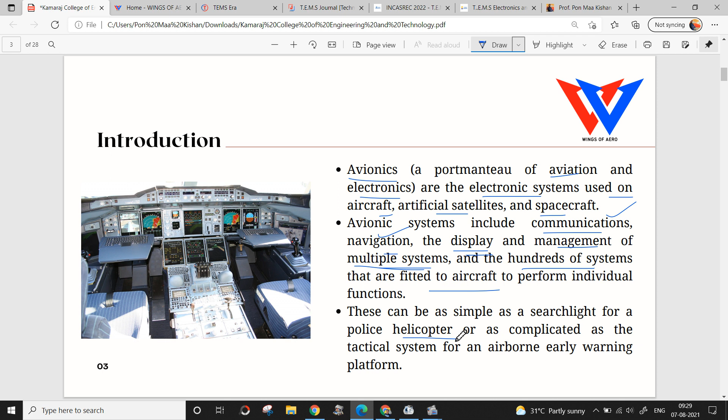Before entering into the core area, I would like to show one interesting slide so you can understand how this lecture is going to be helpful for your bright future.

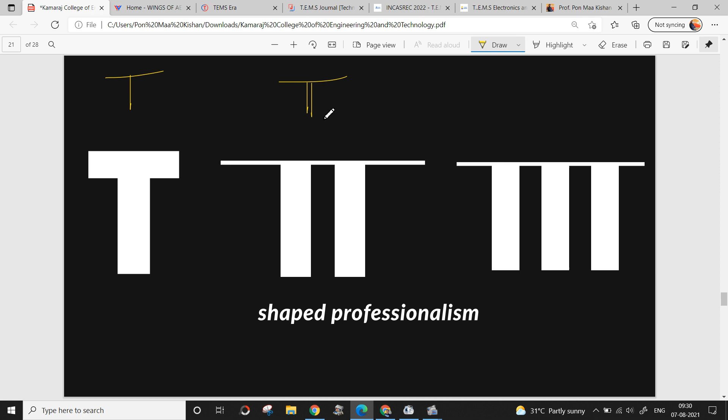Basically, professionalism - you are a professional student, and when you complete the degree, you are a professional. Your faculty is a professional, and everyone, all engineers working out there, come under professionalism. Here I have mentioned three different categories of professionalism: the first is T-shaped professionalism, the second is Pi-shaped professionalism, 3.14, and the third is M-shaped professionalism. So why am I going to explain this, and what is the importance of this professionalism?

At the end of the lecture, you should be aware of how this is going to help your future. So let's start with T-shaped professionalism first. There is a horizontal line and a vertical line in the T shape.

Let's consider the horizontal line indicates the engineering degree we are studying, and if I'm speaking about myself, the vertical line is my degree branch, aeronautical, aerospace. In your case, it is electronics and communication. Generally, when people pass out, they come with this category. If there are 100 students, over 90 come with T-shaped professionalism - that is, engineering is our degree, and our branch is aerospace, or EC, or mechanical, whatever it is.

But what does a company currently expect? What does the industry expect from us? There are so many engineers out there, so they don't need those who are specialized only branch-wise, like someone with a degree in aerospace, or a degree in EC.

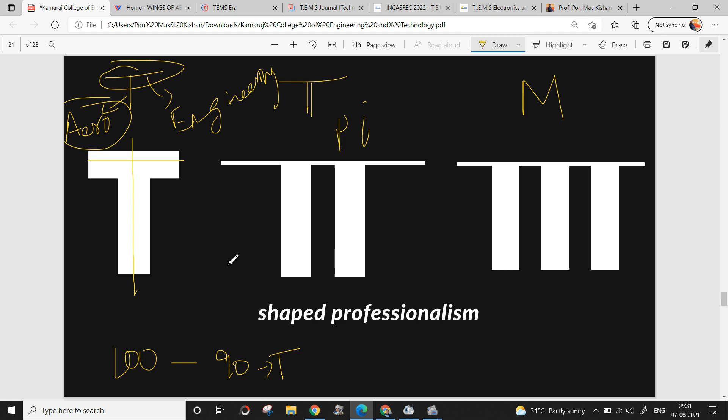The companies currently in 2021 are expecting pi-shaped professionalism. So what does this pi-shaped professionalism mean?

So again, we are having a horizontal line and two vertical lines. This horizontal line indicates engineering, and the vertical lines indicate our branch, in your case EC, or aerospace in my case, and the second vertical line is the area in which I am specialized. There are many areas in aerospace: aerodynamics, propulsion, flight mechanics. There are many specialized areas.

I can also include avionics. There are many specialized areas. So in which area am I specialized? Being an engineer, I have to get specialized in one of the core areas, aerodynamics, flight mechanics, or avionics. This is what the company is expecting. I don't need a general degree, I need people who are having a specialized area.

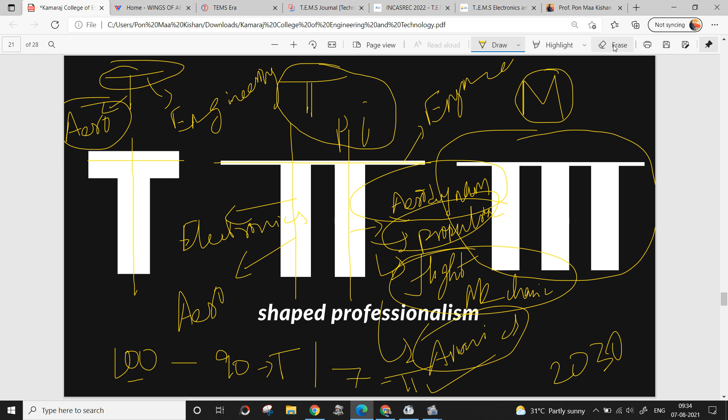Again we are having a horizontal line and 3 vertical lines. The horizontal line indicates engineering, the first line indicates my branch, aeronautical, and the second line indicates my specialization. Let's consider, in my case, I am specialized in flight mechanics. So the third vertical line indicates how I am going to apply or collaborate with other branches.

I am having a specialized aerospace branch degree, and I have specialized in flight mechanics, but that is not enough. How am I going to use a third specialized department, let's say computer science, mechanical, or electronics ECE? How am I going to use these specialized departments that will help in my specialized area, that is flight mechanics?

I have to take applications of CSE either to develop some software for my flight mechanics subject, or go to the mechanical department to do some materials research, or do some mechatronics research work, or work with the electronics ECE department to develop electronics which will help my specialized area, flight mechanics.

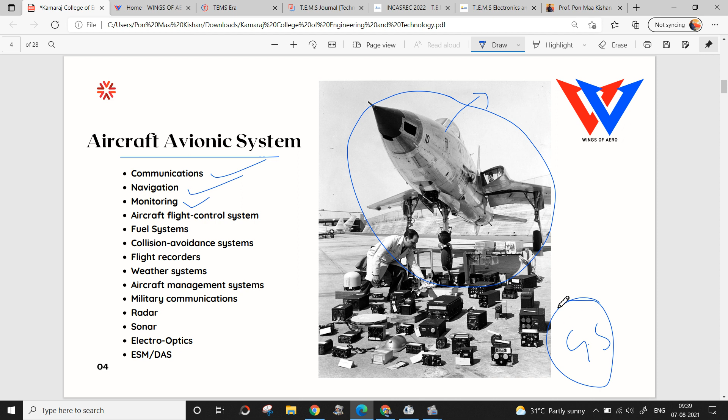Monitoring: the entire aircraft will be monitored. The systems of the aircraft will be monitored in the cockpit by the pilot, as well as from the ground station. Ground station, GS. You might have heard about the air traffic controller, ATC. Every airport has this air traffic controller, and they will monitor your movements. All the systems will also be monitored in the pilot's cockpit, and apart from that, the ground station will also monitor your flight. So for that too, electronics is very much important.

Aircraft flight control systems: how are we going to control the aircraft? We have to fly, right? We are not driving a car. A car has wheels and drives on a road, but here we are going to fly. So to fly in the air and to stabilize the aircraft, we need flight control systems. I will explain what control systems are there and how this can be done mutually with electronic instruments. So flight control systems are very much necessary.

Here I have just listed these out. In the next upcoming slides, we will see in depth all these systems. So flight control systems we will see in the later slides.

Fuel systems: fuel sensors and fuel. The fuel is stored either in the wing or under the fuselage of the aircraft, under the wing or under the body of the aircraft. So fuel injection, fuel separation, and fuel alignment have to be decided and controlled. Fuel flow control needs to be done. So fuel systems are there.

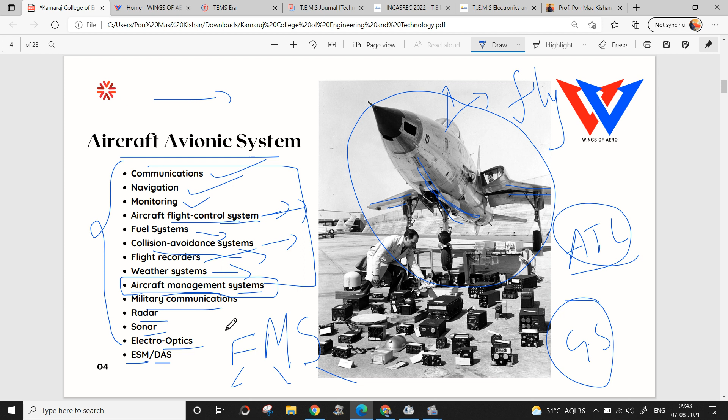So then we are having military communications. For fighter aircrafts, different types of communication systems will be used: military communication, radar, sonar, and electro optics will also be used. ESM and DAS are for defense. We will see what these factors are and how they are helpful in upcoming slides.

So these are the avionics systems. What I have given is systems - what are the instruments used in an aircraft? As I told earlier, I am not going to cover the modern aircrafts. I am going to cover the basic aircraft instruments, since you guys are not very much aware of what the instruments used in the aircraft are. Once you understand these concepts, you can learn many things about modern aircrafts also. So let's see what the basic aircraft instruments are.

Pitot static systems and instruments, altimeter, vertical speed indicator, airspeed indicator, attitude indicator, heading indicator, turn indicator, slip/skid indicator, turn rate indicator - these are the very basic aircraft instruments.

When I speak about very basic aircraft instruments, I hope you might have seen some aircrafts which have a two-seater aircraft for pilot training, or some aircrafts having a four-seater aircraft. So in those aircrafts, how and what type of instruments will be there? That's what's listed over here.

So we will see this. First of all, what is Pitot static systems and instruments? I will explain all these instruments, no need to worry. So let's see the first one, Pitot static system and instrument.

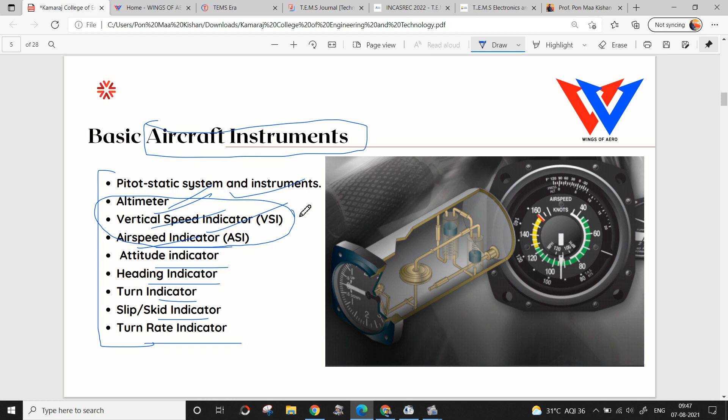So here we are having airspeed indicator, vertical speed indicator, and altimeter. I will explain all these instruments individually in the upcoming slides - altimeter, vertical speed indicator, and airspeed indicator. All these three instruments work with a single system called pitot static system, without which these instruments cannot work.

So let's see what this altimeter is working on, and what this vertical speed indicator is working on, and airspeed indicator.

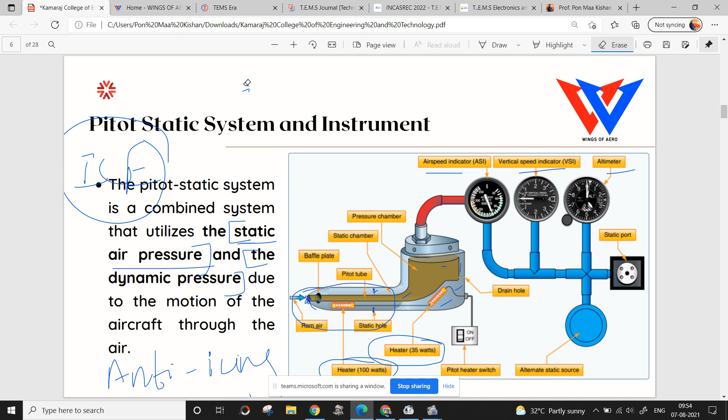Once we get the initial value of pressure, because we are flying at 10 kilometer altitude, we need to know the value of pressure so that we can find out at which altitude we are flying and at what speed we are flying.

So the first instrument we are going to see is altimeter. So here we are having three instruments: altimeter, vertical speed indicator and air speed indicator. So the first one we are going to learn is altimeter.

So altimeter, as I told, this is the basic mechanical instrument which was used earlier in the olden aircrafts. And it is still used in pilot training aircrafts and small aircrafts, 10 to 20 seater aircrafts. They are using this manual system, manual instrument. But altimeter is very much necessary. In modern systems also we are having altimeter, modern avionic instruments also have altimeter.

Altimeter is the instrument which will help the pilot to know the height of an aircraft above a given pressure level. We are having sea level, mean sea level, we will be calling that mean sea level. Suppose the aircraft is flying at a certain altitude, the pilot cannot determine with his naked eye at which altitude the aircraft is flying. So one instrument which will help the pilot to calculate the height of the aircraft is this altimeter.

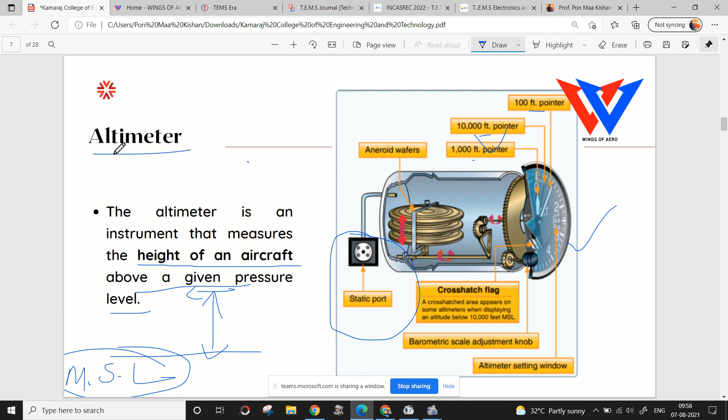So the next one is airspeed indicator. Altimeter will help us find the altitude of the aircraft, and airspeed indicator will help us calculate the speed of the aircraft - speed of the aircraft, like speed of our car or bike. We are measuring the speed of the car or bike, but it is not the easiest thing like measuring for a bike or car, because we are flying, we are not driving.

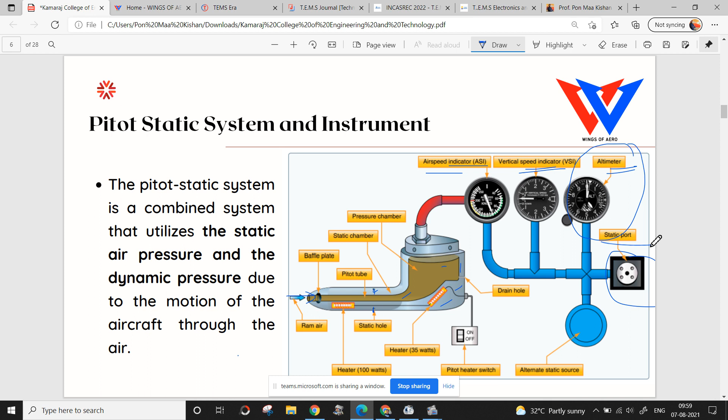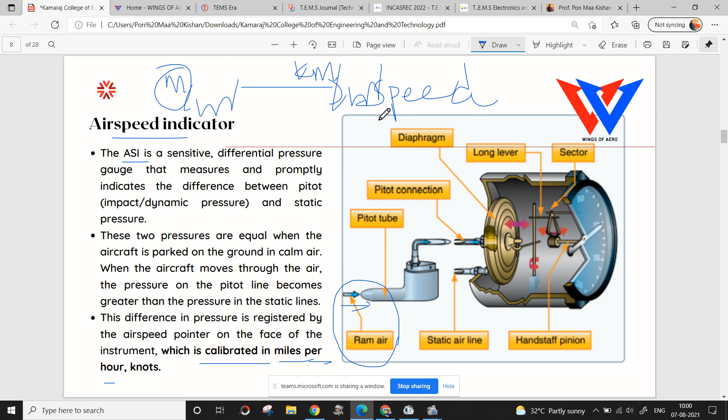So the airspeed indicator needs the dynamic pressure, that is ram air. In the pitot static tube we have the inlet air over here. So the altimeter will use the static port, whereas the airspeed indicator will use the dynamic pressure, ram air. So airspeed indicator, or ASI as they call it, is an instrument which will help calibrate the speed of the aircraft in miles per hour - like how we mention kilometer per hour, they mention miles per hour for speed of the aircraft. So to measure the speed of the aircraft, we need the airspeed indicator. This is the second instrument.

So the third instrument is vertical speed indicator. We just learned the airspeed indicator, which means the speed of the aircraft. So what is this vertical speed indicator? We have to understand that our aircraft is not only going to fly in a straight line, our aircraft is also going to fly in a vertical way.

From takeoff, the aircraft is going to fly in a vertical way. It is not only flying in a straight leveled path. It will take off, descend, take off again, perform maneuvers, and various types of activities. So this vertical speed indicator will help us calculate the speed of the aircraft when it is flying vertically.

So horizontal is the speed of the aircraft. Airspeed indicator will help us calculate the horizontal speed. Vertical speed indicator will help us calculate the vertical speed.

So what does vertical speed mean? When we speak about speed, how is it determined? Speed of the aircraft from one point to another, one location to another, like in a bike or car too. Similarly, when traveling from one location to another, the distance is calculated, whether 2 km or 3 km, and how much time is taken to cover that horizontal distance.

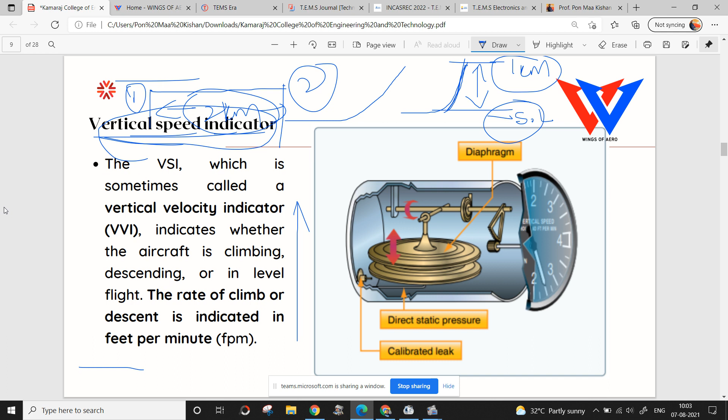So three instruments we have learned so far. One is altimeter, to identify the altitude. Second is airspeed indicator, at what horizontal speed the aircraft is flying. And vertical speed indicator, at what altitude the speed of altitude needs to be determined - that is called rate of climb or rate of descent, in feet per minute.

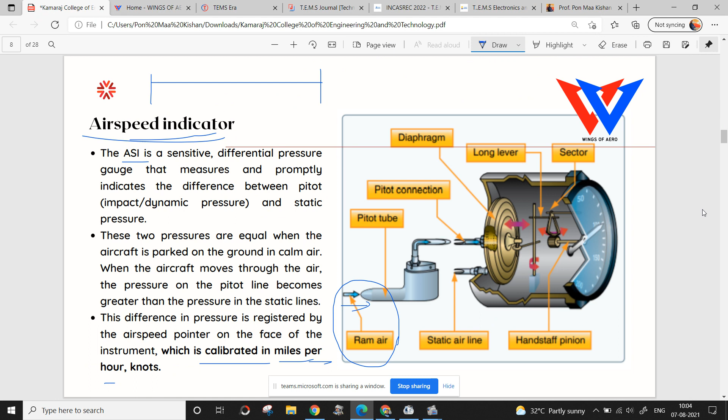So these three preliminary instruments are very much used in the aircraft. So the fourth instrument is turn indicators.

So when we speak about turn, the word turn means like when we are riding a bike or car. When there is a sudden turn, in the left or right turn, we turn the bike or car at a particular speed. We will be reducing speed, moving the steering, and turning left or right as indicated.

But when it comes to the aircraft, it is not that easy, because in a bike or car we are driving with support - the wheel is supported on the road, on the ground. But in an aircraft there is no support. We are flying and we need to turn.

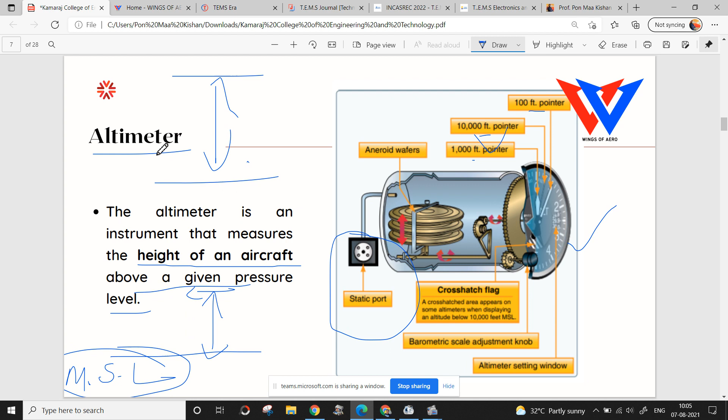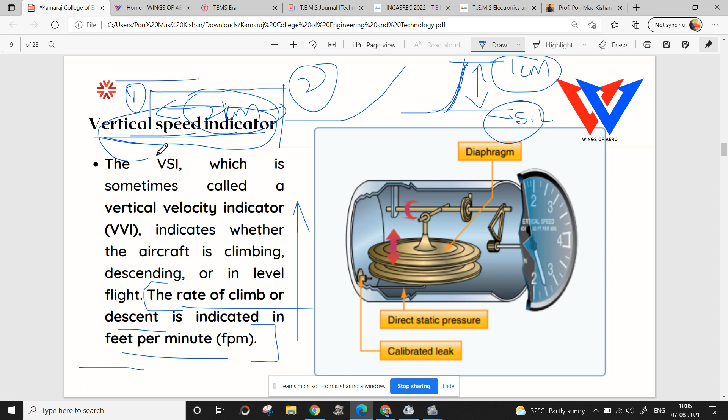So for better understanding of this concept - what is exactly happening in this turn coordinator and turn slip indicator - I need to explain a few factors. Without these few factors, you cannot understand what is happening in the turn indicator and turn coordinator. You can easily understand altimeter, to measure the altitude at which the aircraft is flying, airspeed indicator for horizontal speed, and vertical indicator, the rate of climb. But when it comes to the turn indicator, you cannot simply understand what is happening - you need to know how the aircraft is flying and what are the aircraft control surfaces.

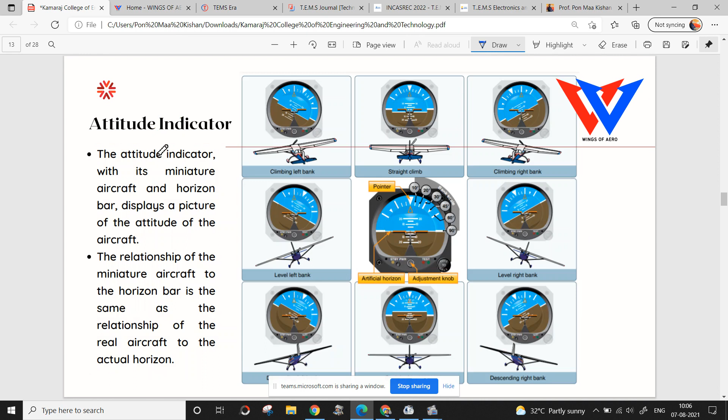So for that, I have included the preliminary aerodynamic forces of an aircraft. Even though you are an electronics engineer, you should not think why I need to know these factors. This is the multidisciplinary, M-shaped professionalism. M-shaped means multidisciplinary. You are an engineer specialized in electronics, and you are going to apply that knowledge in another field. Here we are learning about aerospace vehicles, so you need to know some mechanical concepts too. Without that, you cannot apply your knowledge in that particular field.

So don't think this is not going to be helpful for you. When you want to apply your knowledge in the aerospace sector, you need to know the basic concept of how the aircraft flies. So the basic forces on the aircraft are these four types of forces, and the first one is lift.

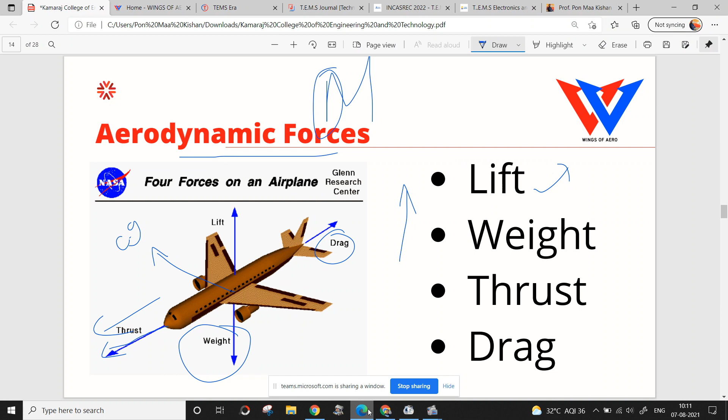Okay, ma'am, fine. So these four forces are acting on the aircraft, and another thing is control surfaces. This is very much important. As I told earlier, in the first system itself, we have various types of control systems, because the aircraft needs to be controlled.

When we are flying any object, it has to fly continuously. Suppose if you are not having stability, it will fall down. So many of you are playing cricket, right?

You might have heard about in-swing, out-swing, and even when the fielder is throwing the ball. At that time we need to do various types of tricks. Every player will be doing some tricks for in-swing and out-swing, rotating the ball to perform that. Similarly, when the bowler is throwing the ball, it is also in the air and it will be rotating, the ball itself rotates to create a movement.

So like that, when the aircraft is flying in the air, to maintain stability, we need various types of control surfaces, control surface systems. The pilot's cockpit will be here, and in the wing section we have various types of control systems, and also in the tail system, tail surface, we have various types of control systems.

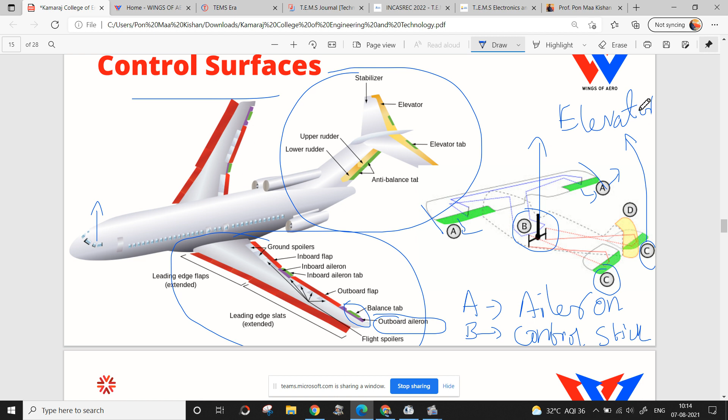And C over here is the elevator. These are all very technical terms, so you cannot remember them easily, but try to understand. These are all the control surfaces - without these control surfaces, the aircraft cannot fly. D is rudder. D is rudder, A is aileron, B is the control stick, which is used and controlled by the pilot for the entire aircraft.

And C is the elevator, green color again in the tail section. So this is in the wing section, this is in the tail section - elevator. And the yellow color one is rudder.

So these three control surfaces - aileron, elevator, and rudder - are used to control the aircraft. Like in a car, we have steering, accelerator, brake, and clutch to control the car. Similarly, in aircraft, although there are various types of parts - engines, instruments, everything is there - when we speak about control systems, these three are very much necessary: aileron, elevator, and rudder.

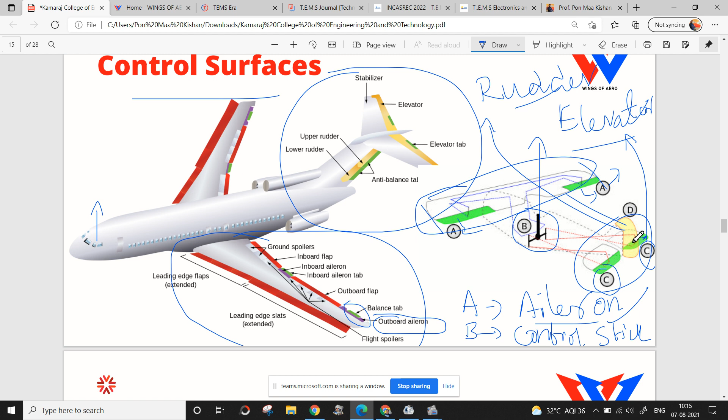Even in spacecraft - I hope many of you might have heard about the space shuttle - I will show how the same concept is implemented in the space shuttle also, so that you can easily understand.

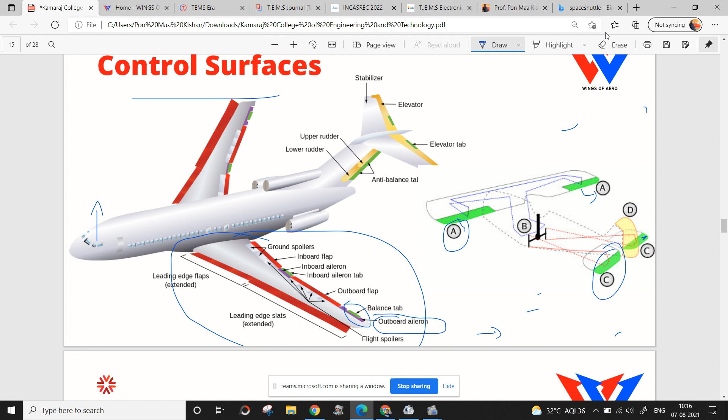The mechanical control system - because the modern control system uses avionics, various types of instruments - but in the olden days they flew this aircraft with mechanical linkages. Mechanical linkages means they used wires to connect all these surfaces, so here you can see they used wires. Now they have sensors where the entire control system is connected with various types of sensors to activate the control surfaces. When we have sensors, we can go for autopilot mode.

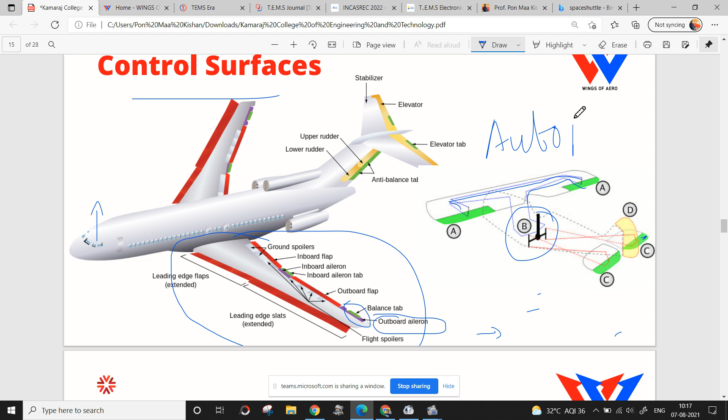So I will explain what autopilot mode is and how they are achieving this autopilot mode. Okay, so this is the control surfaces. Let me switch on my camera so that I can explain with the video and you can understand how the aircraft is going to fly.

So this is the top view. I am showing the top view. Our ailerons will be located here, in the wing section, both sides of the wing we will have an aileron. At the tail we will have the elevator, and at the vertical stabilizer we will have the rudder. So all three control surfaces are going to control the entire aircraft.

So when we speak about controlling the aircraft, it can move up or down, the aircraft can move left or right, and the aircraft can also roll right and roll left. So three different movements the aircraft can give. One is pitching, which means up and down.

So next time when you are flying in an aircraft, you have to understand this concept. When the aircraft is going up, this is pitch up movement. When it is going down, this is pitch down movement. When the aircraft is rolling left or rolling right, and when the aircraft is turning left or turning right, this is called yaw. This is the rolling movement, and this is the pitching up and pitching down movement. So three different movements are there in the aircraft, and we control the entire aircraft with these three different types of movements.

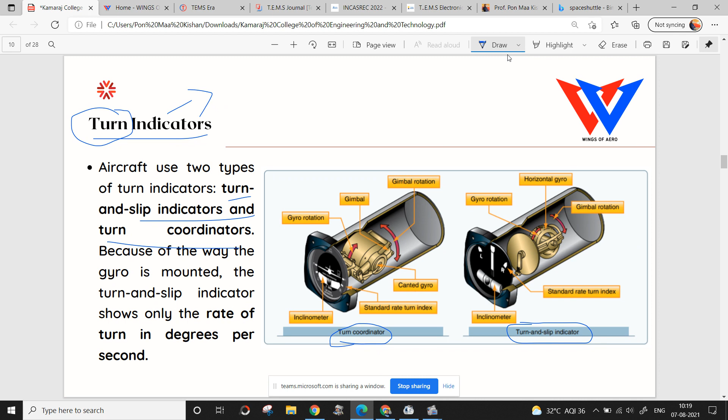So as I told you, the aircraft has three different movements: pitch up, pitch down, left turn, right turn, and also rolling movement. I can explain with this slide itself. When the aircraft is moving up and down, that's pitch movement. When the aircraft is moving left and right, that's turn movement. When the aircraft is rotating clockwise and anti-clockwise, that's rolling movement. Every aircraft, fighter aircraft, spacecraft, everything has this same type of movement.

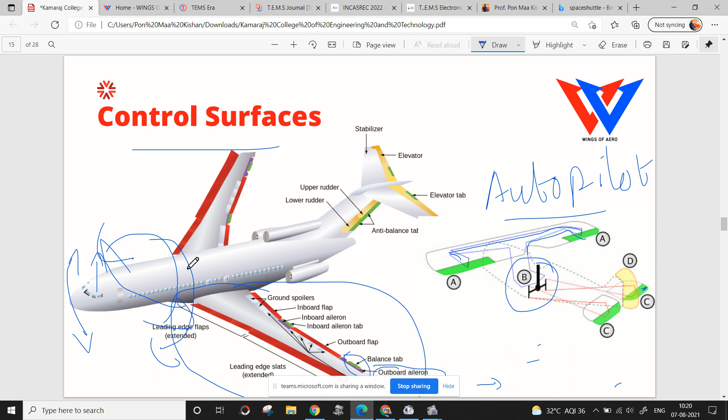Okay, so these need to be controlled with the turn indicators. Why do we need turn indicators? What is the necessity of the turn indicators?

When you are driving a car at, let's consider, 90 kilometers per hour speed, and there is a sudden turn, can you possibly turn the car at the same 90 kilometers per hour? That's not possible. We cannot turn the car with a sudden right turn at the same speed. So what will we do? We will do the necessary reduction in speed, slowing down to 40 kilometers, then 30 kilometers, and then we will perform the turn.

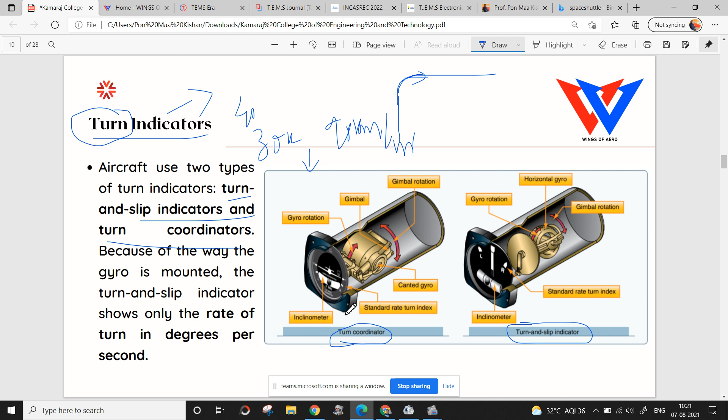Similarly, when the aircraft wants to turn, we need a particular speed limit and a particular turn angle also. That will be determined with the turn coordinator and turn-and-slip indicator. So let's see in the next image how this system is working.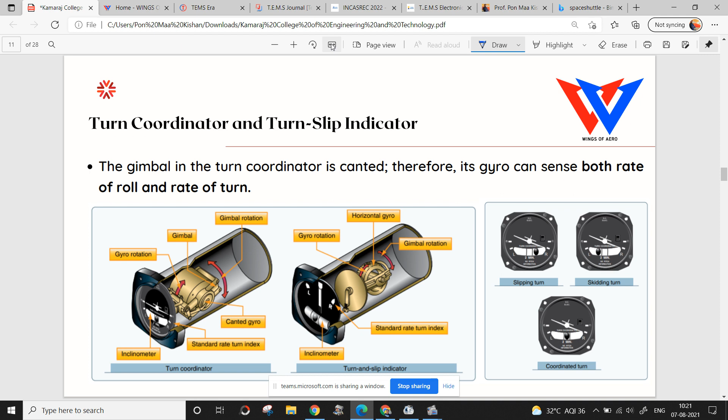So here is this turn-slip indicator. You can see a knob in the instrument, a black color knob. When the black color knob is in the middle, that is the perfect turn, and the aircraft is said to be in a coordinated turn. So the pilot will always prefer going into the coordinated turn.

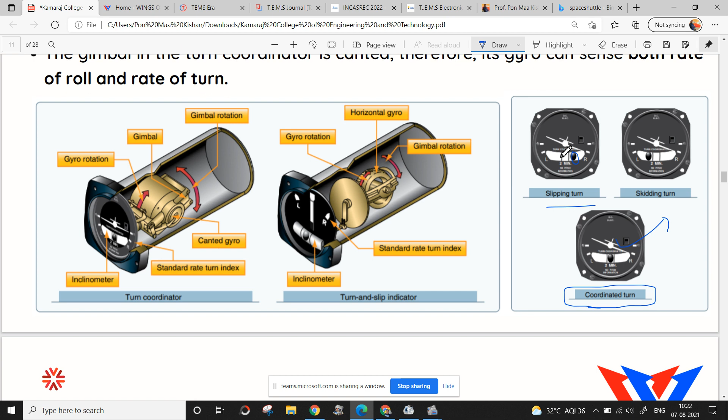When the black color knob, the ball, moves out of the center, the aircraft will start to slip. What does slip or skid mean? In a car or on a bike, skidding happens when we are driving at overspeed, and when we want to turn, the bike will skid. If this is the actual road, due to our overspeed, our bike will move like this instead of following the original path. Due to overspeed, it moves in another direction. That is the skid.

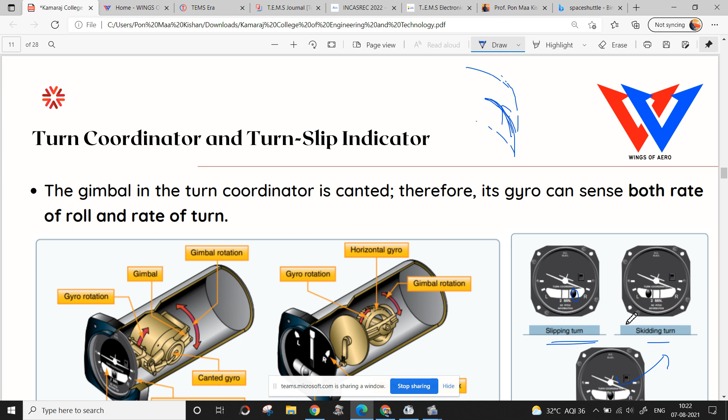If you are flying, if you are driving with less speed, what will happen? It will be turning here itself, so that is called a slip. Similarly in the aircraft also, the same concept is applied. So always the pilot needs to fly with the coordinated turn.

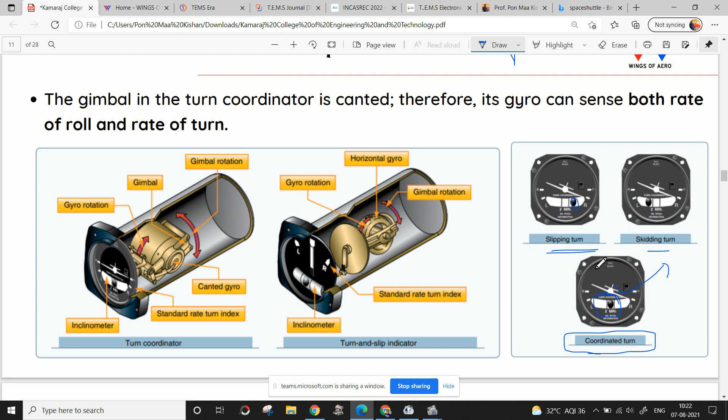Coordinated turn - this instrument, the turn indicator instrument, will help them control the aircraft. The final instrument is called the attitude instrument. As I told, there are three movements: pitch, roll, and bank. All these three types of movements are controlled with the attitude indicator.

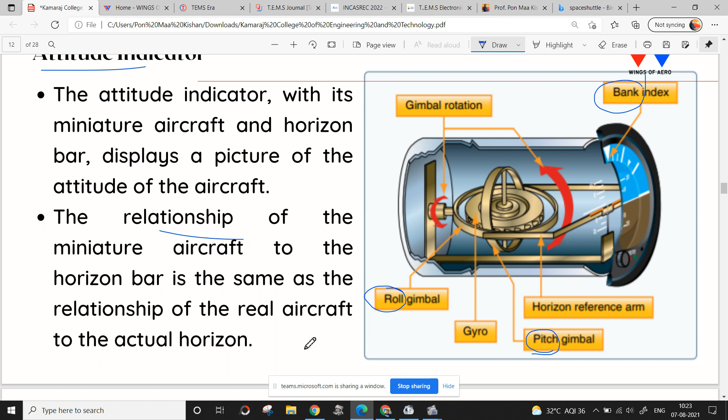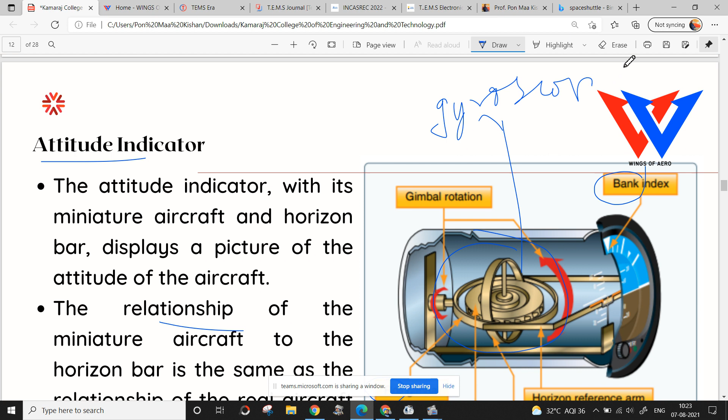The attitude indicator is working with the principle of gyroscope instruments. On the basis of gyroscope, the attitude indicator is working. So here you can see the movements of the aircraft.

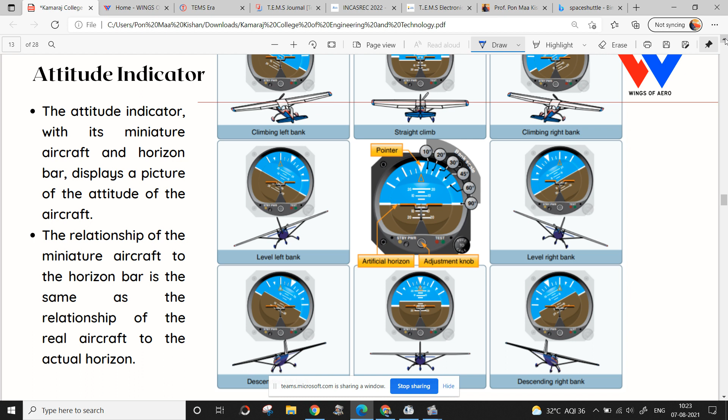So here you can see climbing left, straight climb, and the movement of the attitude indicator. You can see the entire system is turned, and here also you can see the entire system is turned.

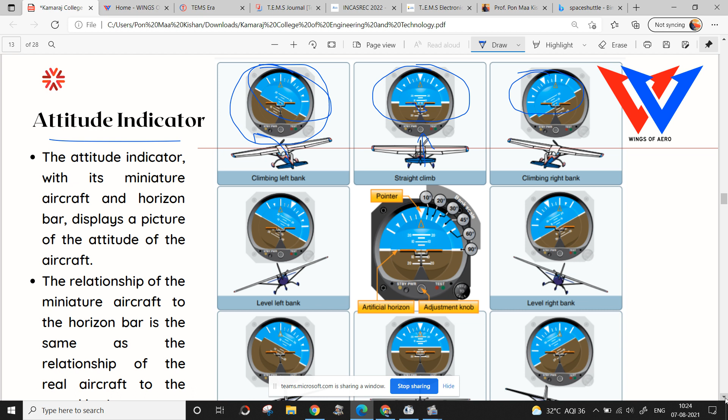Here you can see the indicator is showing you are flying straight, but here you can see it is showing you are flying left side, you are flying right side. So with this we can control the aircraft, whether we are flying straight or flying left or right. So this is the attitude indicator.

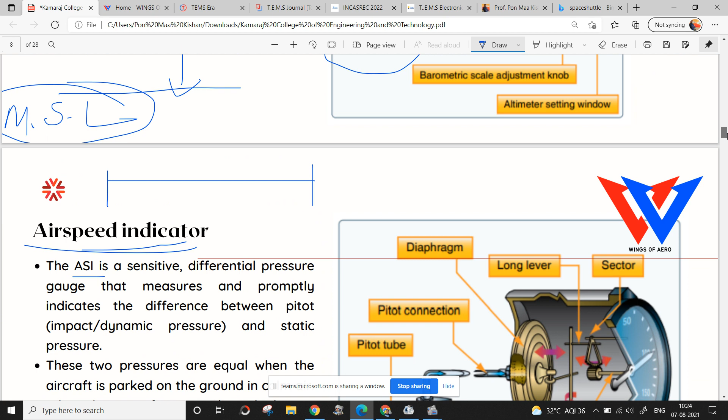So all these basic instruments - attitude indicator, turn coordinators, vertical speed indicator, airspeed indicator, and altimeter - are used as basic instruments.

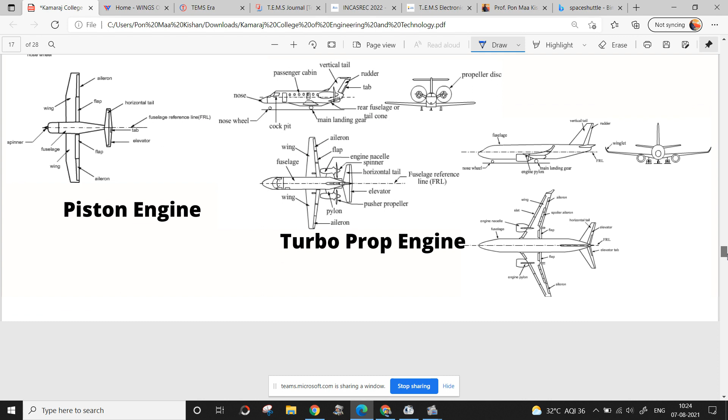So I have shown you the mechanical concept, right? But how has it been implemented in modern aircrafts? The modern aircraft electronic flight display plays the vital role, because nowadays everything is coming in touch screen mode. Even SpaceX, which launched their spacecraft last year, gave it a full touch display.

In the spacecraft, they have removed the button system and implemented a full touch display. You can read about that, but those research articles and papers are not fully available on the internet. Some concepts are available. There are no proper books written about these particular programs for spacecraft or how they implement these systems. Some research papers are available - you can learn through Google Scholar itself.

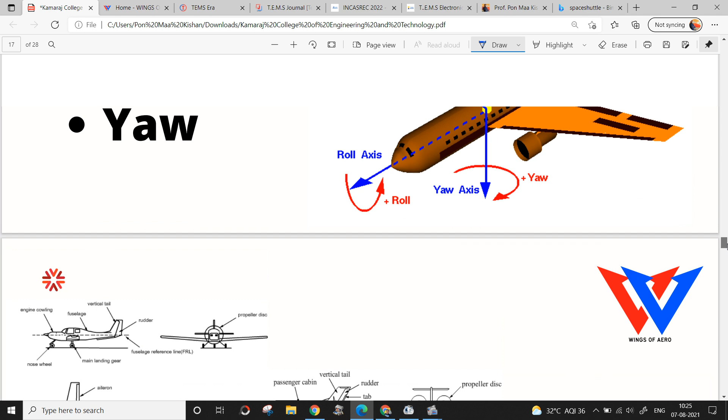So how do these modern electronic flight systems work? Whatever we have learned earlier with the basic manual mechanical concepts and their necessary parameters, all these parameters are listed in a single display column.

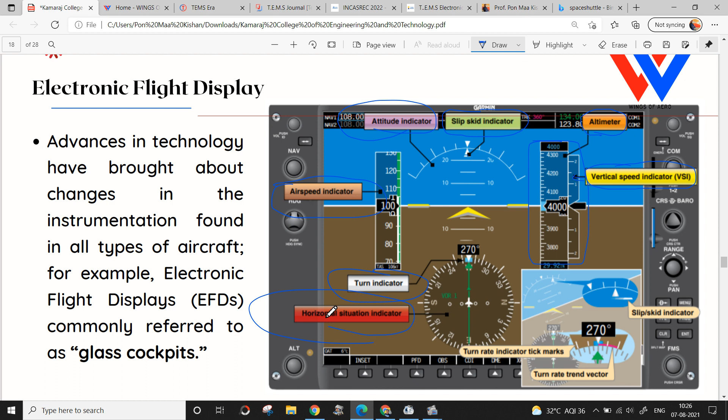Airspeed indicator is here. Horizontal situation indicator, that is near about the magnetic compass. All these are located in a single display itself.

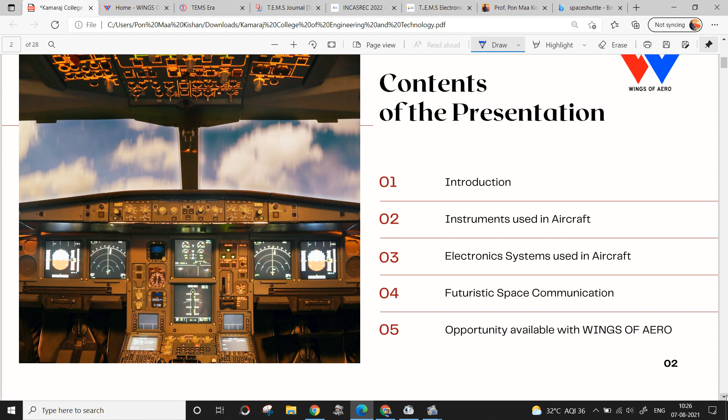Before that, all these instruments we have seen were available separately in the cockpit. When it comes to the modern avionic pilot display, it all comes under one single display itself. In SpaceX also they have implemented this.

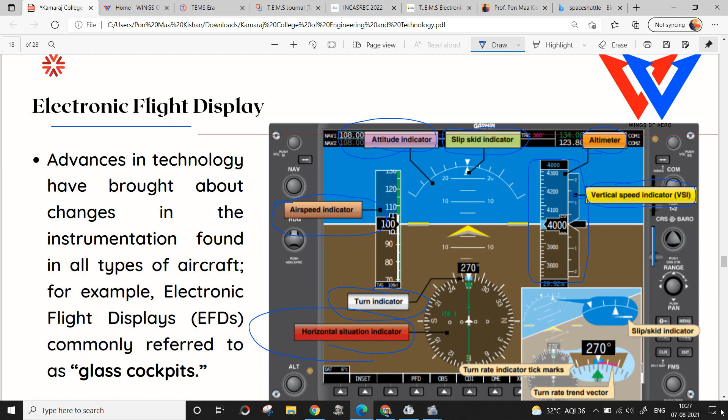So how are they going to manage the entire systems? We have various types of systems. They have implemented a flight management system, also known as FMS, which has different types of own operating systems.

Like we have Android OS for mobile, Windows OS for systems, and various types of Linux OS. For a pilot's cockpit, they have a separate operating system, and using that operating system, they will feed the data - feed the data means, as I told earlier, how the autopilot system will be working.

When the aircraft or spacecraft introduces this flight management system, the data will be stored. What type of data will be stored? Let's say I want to fly from Chennai to Delhi without a pilot, fully autopilot system - Chennai to Delhi without pilot, I am going to fly.

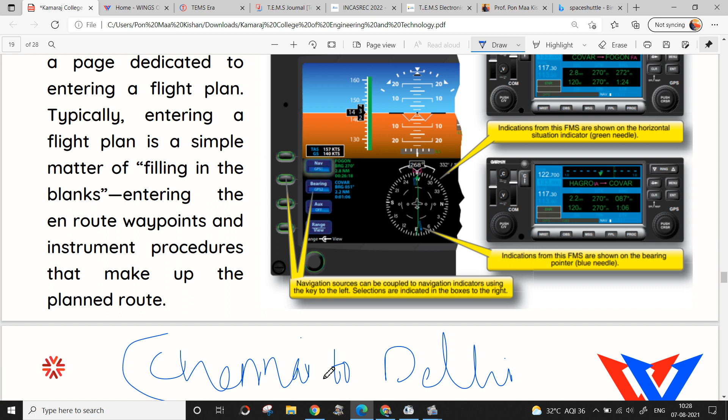So what are the necessary factors I need? First of all, I need to know at which altitude I am going to take off. So I have to start collecting the data.

Chennai is having an altitude from sea level, let's say 100 meter, sir, altitude. Your voice is breaking, sir. Now it is clear. Yes, sir, clear. Sorry for that.

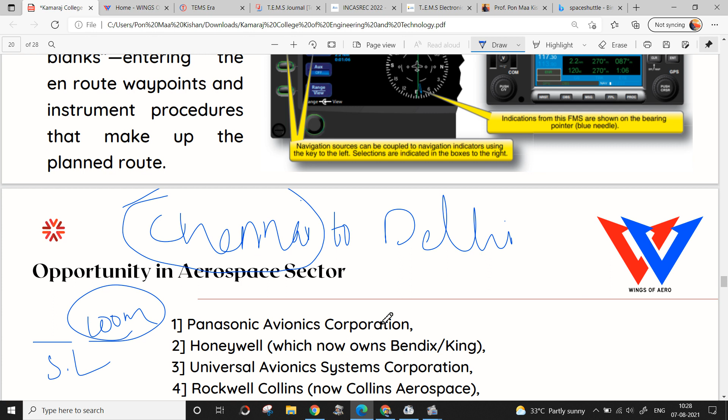So Chennai to Delhi, we are going to fly. Let's say Chennai's sea level altitude is 100 meter. So we are starting our aircraft from the 100-meter altitude. So first of all, we need to include the pressure, density, and all other factors in the flight management system.

So the input data needs to be fed to the computer. Velocity of the aircraft needs to be fed. Control system - as I told earlier, we are having three different control surfaces: aileron, elevator, and rudder. So how much we need to use the elevator, how much we need to use the rudder, and where we have to use the rudder. So all this data needs to be fed to the computer itself.

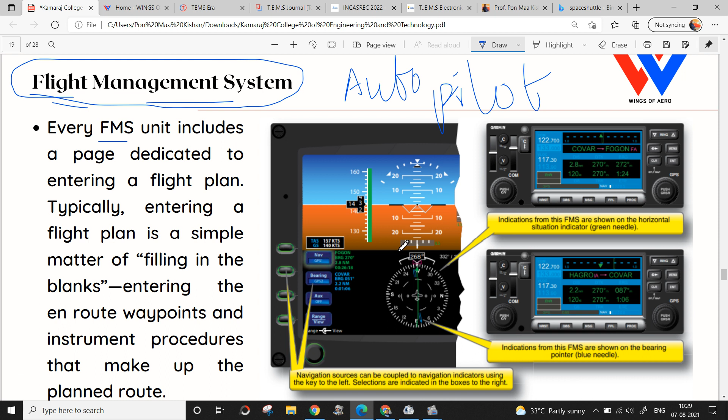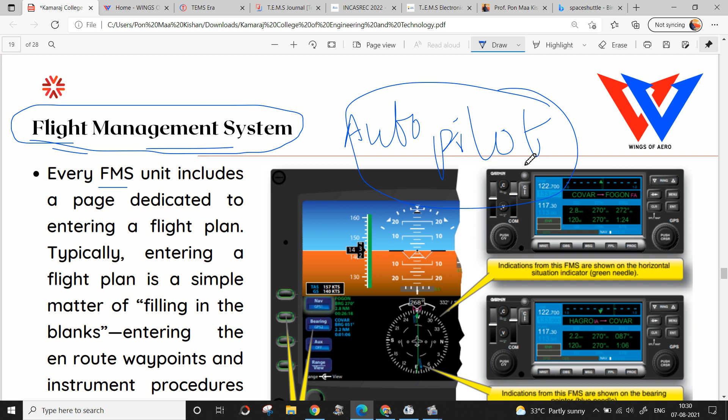Basic coding needs to be done. So even though the concept has been done with electronic instruments, you need to work with the computer science department to understand how to develop particular code for your instruments. Because the entire autopilot system is depending upon the electronic instruments only, and when you want that system to work correctly, without knowledge of coding we cannot perform this multidisciplinary work. So you have to be well prepared to work in multidisciplinary aspects rather than in a single discipline.

So using this autopilot system, we can successfully fly the aircraft from anywhere to anywhere in the world. Not only in the world, right now they are trying to do that with space flight also - entirely autopilot space flight they are planning. Already the satellites are coming under that only, flying in autopilot mode, but for performing various types of missions, they are planning to do the same in manned vehicles also, where the entire aircraft will be controlled in autopilot mode.

So some of the industries are there for those who want to pursue and get a good opportunity in the aerospace sector from an avionics or electronics background. So these are the listed top 13 companies which are all working in avionics systems.

Honeywell is in India, so surely there are many opportunities in Honeywell. Rockwell Collins Aerospace is in India. Thales is also in India. GE is also in India, whereas the most widely used instruments are built by Garmin. So go to YouTube and you can look into the Garmin web page - they have already developed various types of instruments and systems for aircrafts and spacecrafts.

So Raytheon, UTC Aerospace Systems, and in India also, DRDO is having various types of labs - electronics labs. CSIR is also having electronics labs. Electronics here means things that are going to help the aviation sector - avionics, focused on avionics. So you can look into DRDO systems and CSIR labs.

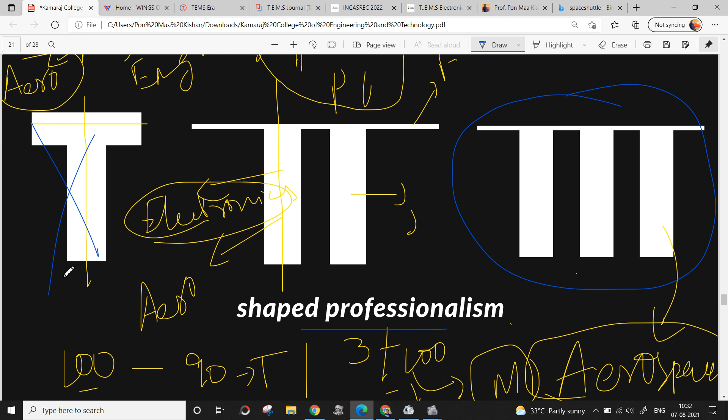And obviously, if you are going for a master's degree, then you can go for IITs, MITs, where people are working with avionics instruments - you can approach them and get better benefit from them. As I told earlier, I request all of you to come and turn yourself into an M-shaped professional, because no one is going to help apart from your faculty. So you have to gather knowledge from your faculty and turn into an M-shaped professional. Don't leave your institution with T-shaped professionalism - that is not going to help you if you want to pursue your career in the aerospace sector.

So with this, I would like to say a few factors about what we are actually working on with Wings of Aero and how we are helping students understand aerospace concepts. We have various types of free courses available - aerospace courses available on our digital learning platform.

Already Sivan sir has also accepted the request, because various ISRO professors and professors from NASA - this event was given by the deputy chief from NASA - have delivered lectures on how to design a spacecraft, how to design a launch vehicle. So all the aircraft design oriented courses are available free of cost. You can learn that at any time without paying anyone.

And we are having some electronics background courses also, which will be available under the electrical and electronics category.

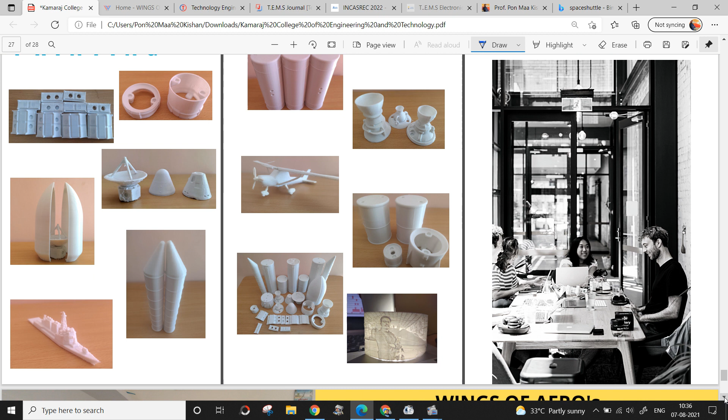And also we are the only one in India using NASA's OpenVSP software. You can check on Google also. We are developing aircraft using this NASA OpenVSP software, and we are providing internships and various programs on that too. So if you are interested, you can join from your institution itself. Our entire work has been recognized in India 56%, US 5.3%, UK 2.1%, and the rest of the world 36.5%. People are using Wings of Aero.

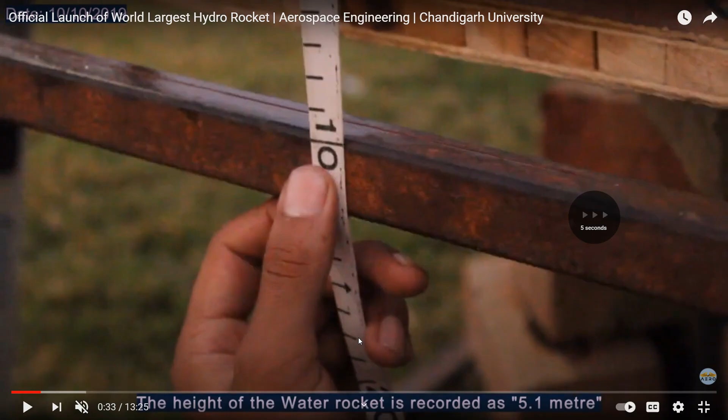So what is our agenda? The previous world record was a hydro rocket with 5 meter altitude. We broke that world record with 5.1 meters.

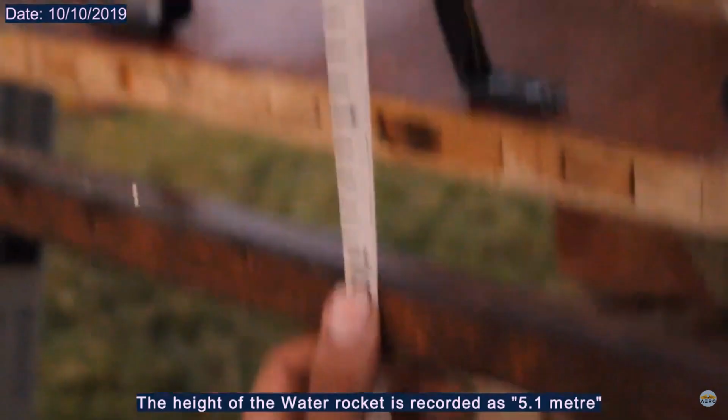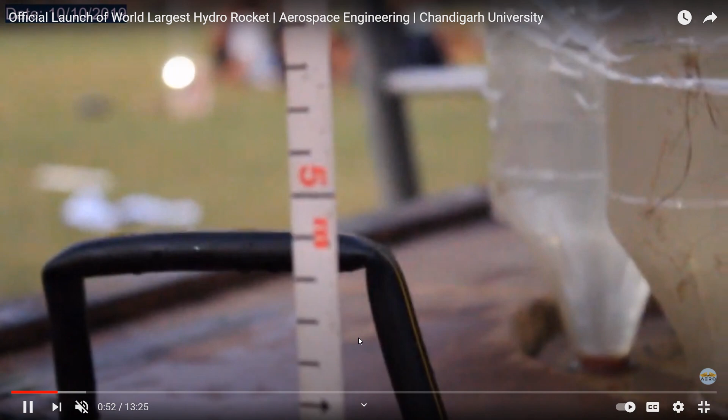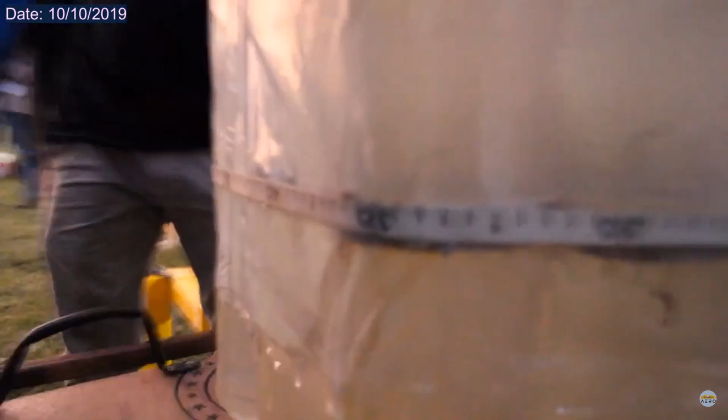Here you can see the altitude, the height of the rocket is 5.1 meters, and we also recorded the diameter, which was 0.5 meters. We broke the previous record, where they only had 4.5 meter height of the rocket. So we developed that.

With our students, even though I am from Tirunelveli, I went to Chandigarh University and took this initiative. By doing this type of activity, students get encouragement because they are practically applying the knowledge they learned in classes.

So we developed that rocket, and during the night time, around 6 to 7 p.m., we launched it successfully.

At the nose section, we placed an altimeter sensor. This sensor helps us identify how much altitude we attained when we launched the rocket, and we also placed a camera for recording.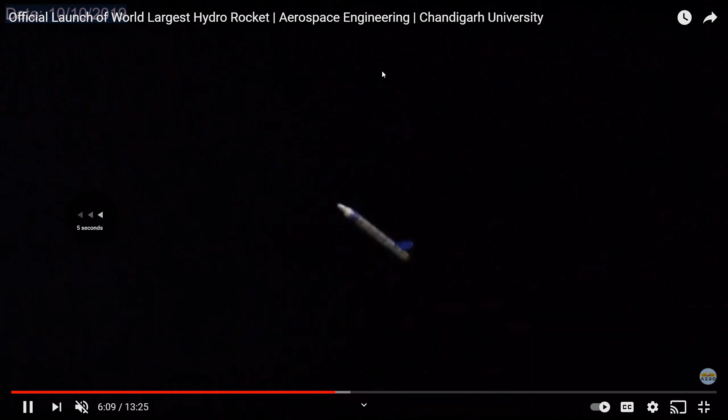So here you can see. I have turned off the audio actually.

This is teamwork, isn't it sir? Yeah, it is a team of about 10 to 20 people who worked on it, including students. Success is not about watching a movie on the first day - the students have to come up with brilliant ideas and successfully carry through their projects. That is the agenda of our work too.

So we successfully launched that and took readings from the altimeter, noting that the water rocket successfully reached about 104 feet. How long did you work for achieving this, sir? Ma'am, we started this work 6 months before, and after 6 months we successfully completed this.

The graph here shows the readings we took from the altimeter sensor. The initial level, 330 meters, is the sea level of Chandigarh. From there we calculated the altitude. This is the peak position, over 360 meters - that is the value.

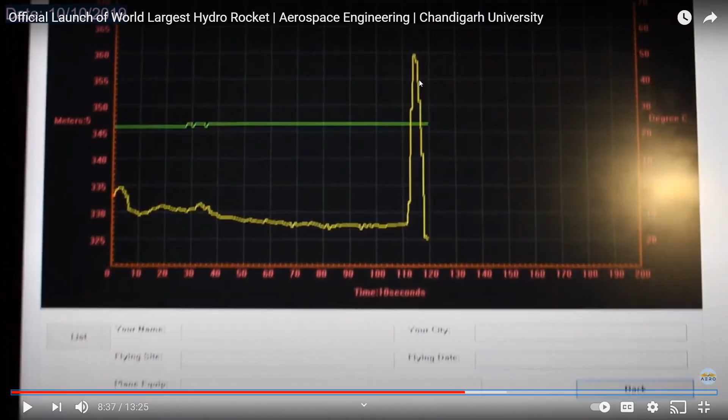From that we identified and recorded 104 feet successfully, breaking the previous record which was 75 feet. So this is what we did for the world record.

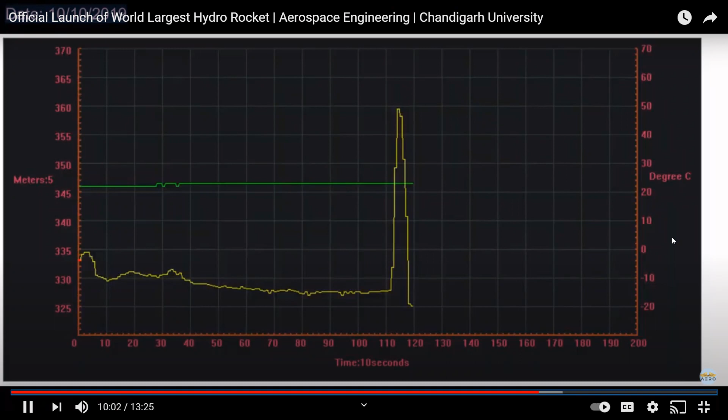How many departments worked together, sir? Ma'am, we included the EC department for the altimeter sensor because we weren't aware of how to calculate that, so we requested help from the electronics department. But most of the people are from aerospace engineering itself.

You told ma'am that the fuel is water, right? Yes sir, so you convert this hydro rocket water into hydrogen? Because to lift the rocket, sir, there are many researchers working on that particular factor, but getting sufficient thrust is much less in that case. People are working on it though, and if students are interested, they can also work on it by using hydrogen gas to lift the rocket.

Yes sir, but they have to be very careful about how they control the hydrogen, otherwise it may cause heavy loss, right? Hydrogen is like a bomb, sir. Yes sir.